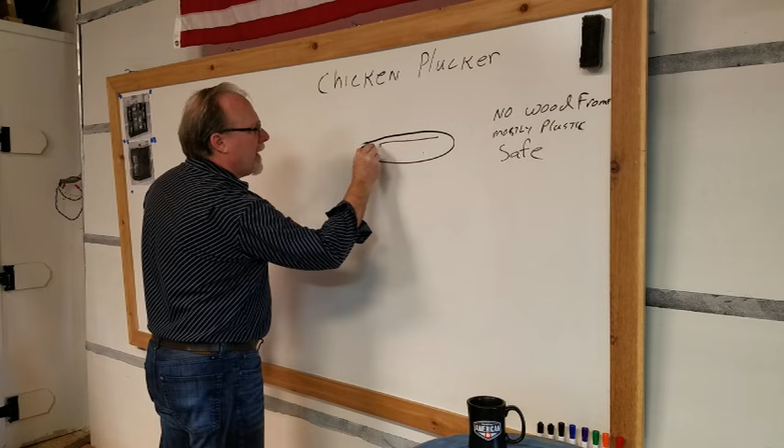So here's the basic plan. I'm going to take and cut the bottom out, or the top, and leave about a 1-inch lip all the way around the drum. The drum's 35 inches tall.

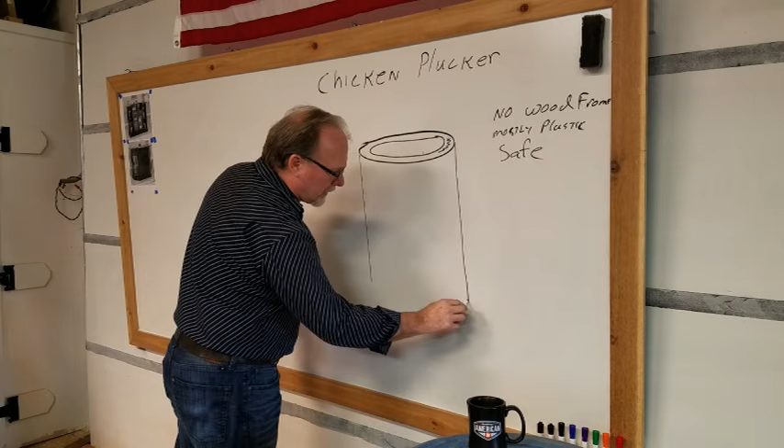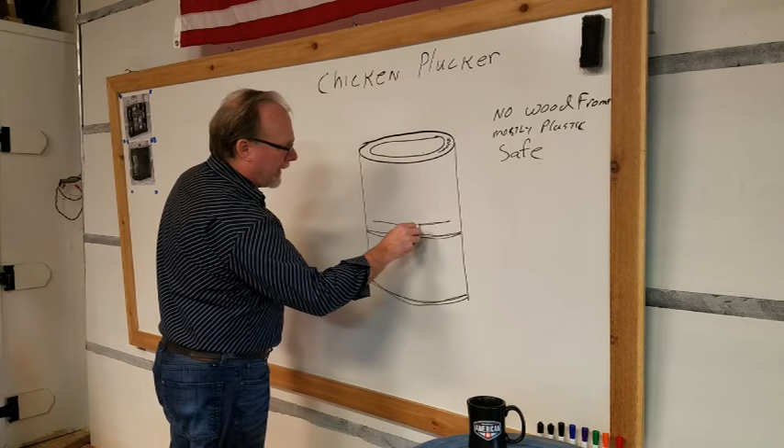About 20 inches down, I'm going to put a polycarbonate partition that'll separate the upper part of the drum from the lower part. And of course, I'm going to put the chicken finger plate, for lack of a better word. I don't know what the heck you call it, but the thing you mount the little rubber chicken fingers to.

You'll have a spindle assembly and a pillow block bearing, a shaft. You'll have a pulley of some undetermined dimension yet, I'm still working out numbers on it. And then a bottom pillow block to support the bearing.

A couple of things over on one side of the barrel. I'm going to have a chute cut in the side for the spoilage. Got to have a place to get those feathers out, of course. I don't want them to fall through.

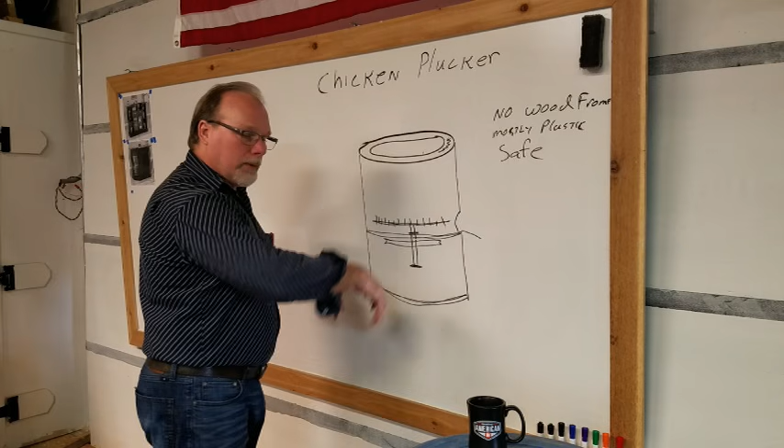The bottom of the barrel, I'm going to cut the complete top out of the barrel, or the bottom, the original bottom. That'll be removed so it's open for drainage. And then along the sides, I'll cut some openings just to help the drainage.

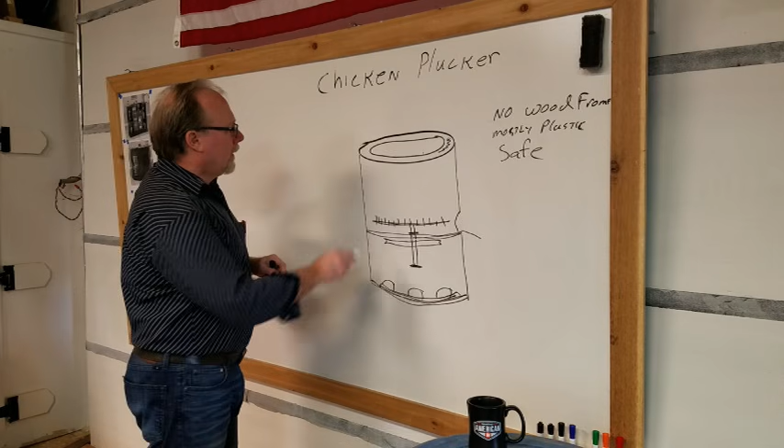I'm going to bend some tubing and mount a frame, kind of like a hand truck, a light mover's dolly. Now I might just go ahead and buy a cheap mover's dolly. I can get one for about $30 at Harbor Freight and modify it. The purpose of this will be to allow you to move the barrel, have wheels on it. It'll also give me a nice secure mount for the motor.

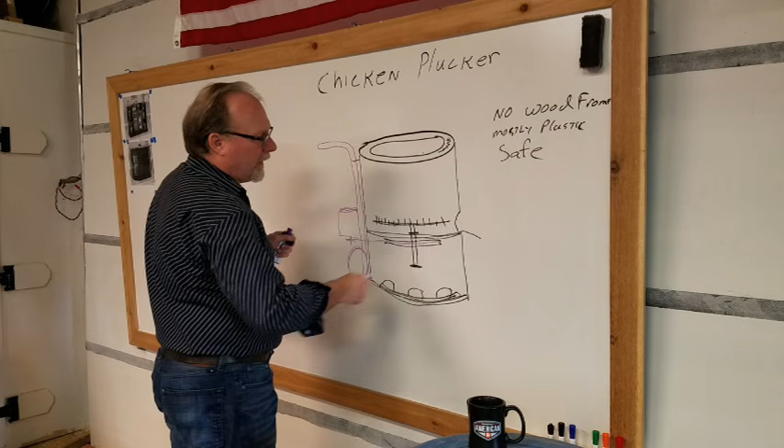We'll put a pulley of some undetermined size, and there's our belt drive. The fingers will mount along the side, just like you've seen in other videos. The goal here is something that he can use, that will last a long time, and not be horribly expensive to build.

Motor's a 1/3 horsepower, I think that's the minimum rating we'll need for a motor. The fingers, about 100 to 150 fingers is what we'll be using.

Along the top, inside this lip, I'm going to put a piece of 3/4 inch PEX tubing in a loop and drill some appropriately oriented holes to jet the water down over the chicken and the fingers to lubricate and wash all the spoilage out.

We'll tee off on the back side here somewhere and come out with probably a standard garden connector with a valve on it. You get these at Lowe's and Home Depot. That'll give us a water cutoff valve and a quick connect.

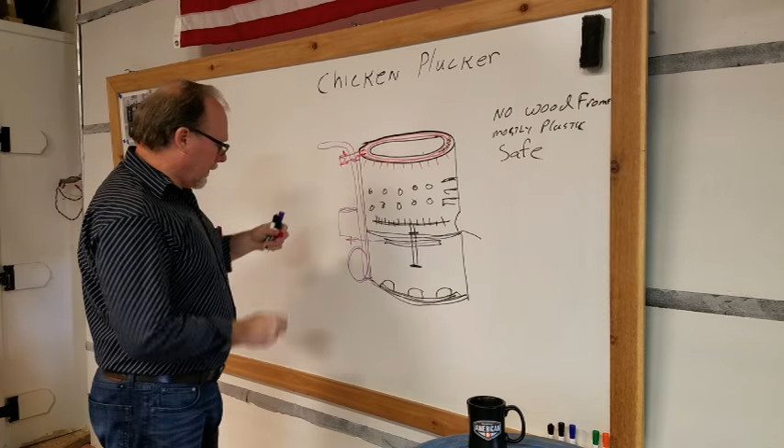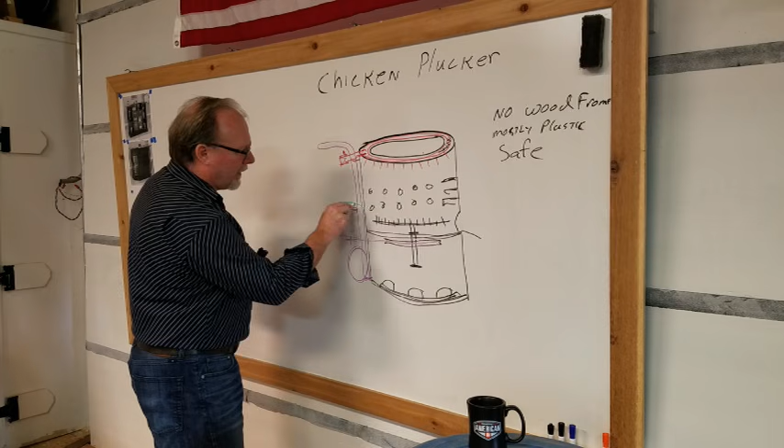And of course we'll have a safety cover. The safety cover will keep the water off the motor, give us a nice drip edge so we can avoid electrocuting ourselves, hopefully. And some type of functional switch that can work in a wet environment without the risk of electrocuting a buddy.

Anyway, that's the basic plan. I've never built anything like this before. I've built lots of different systems, I've designed many systems over the years, but I have to give my friend the credit. He really threw something interesting at me that I think I'm going to enjoy building quite a bit.

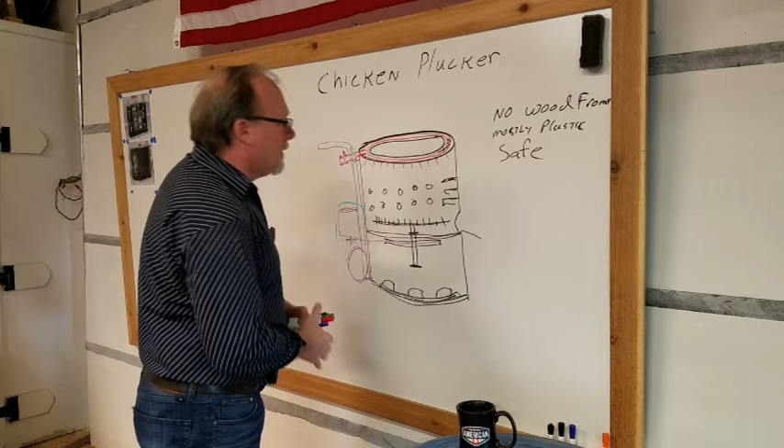The main thing is I want it to last. I want it to be well built so it'll be trouble-free operation, easy to service when needed, and something that you can move around easily and store.

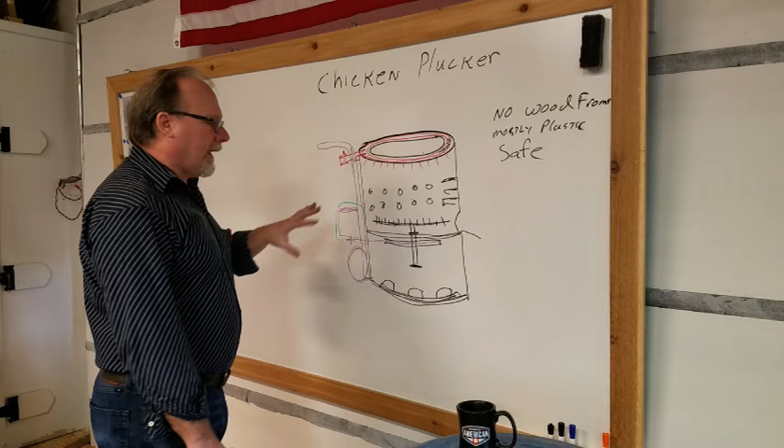No wood on this, like I said. I don't want any wood, that's just going to be a problem. But the metal, I have to consider the rusting and oxidation of the metal. So those are things I've got to concern myself with.

I'm going to engineer this thing on the fly, but this is the basic plan. Like I said, there are all you guys out there on YouTube that have looked at chicken pluckers based on a barrel design. I'm not doing anything radical here, it's pretty much a time-tested design.

The only difference is on this one, I'm keeping the barrel intact. I don't want to cut off part of the barrel and have to build a frame and all these things. Simplify the engineering, simplify the design, keep as much of the barrel as possible, removing as little as possible so we don't sacrifice the strength.

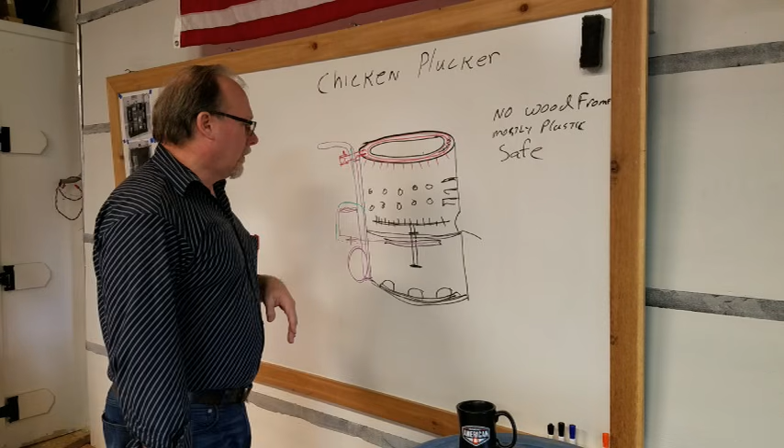Remember, we're going to have - I don't know what a chicken weighs, 4 or 5 pounds maybe, a big chicken - tumbling around in there, maybe 2 or 3 chickens. That's a lot of energy bouncing around inside there. Now granted, it is a chicken, but we still have to keep this thing stable in its function.

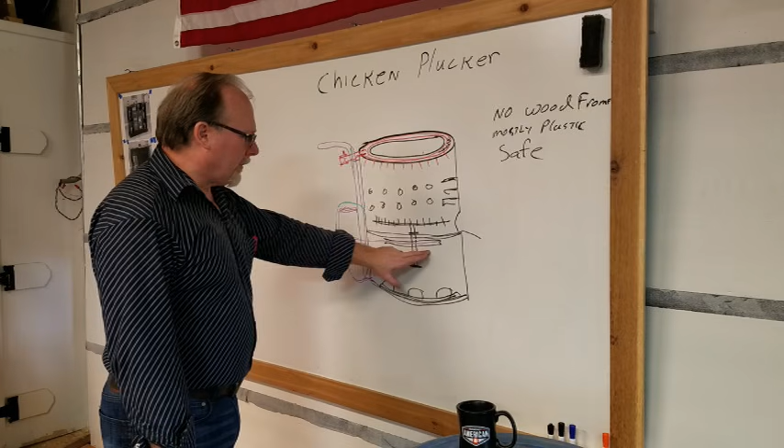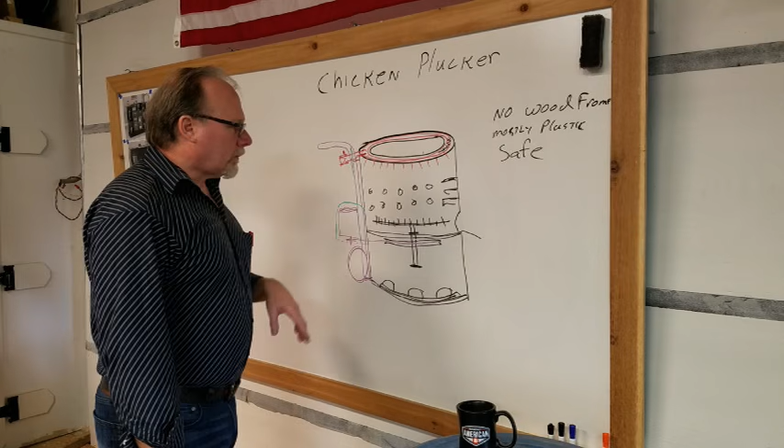Like I said, I don't know the diameter of the pulleys yet, so this ratio, the drive ratio in the motor - 1/3 seems to be a minimum horsepower. That's what I've got to work with. We'll see, so thanks for watching this much, and let's get started with it.

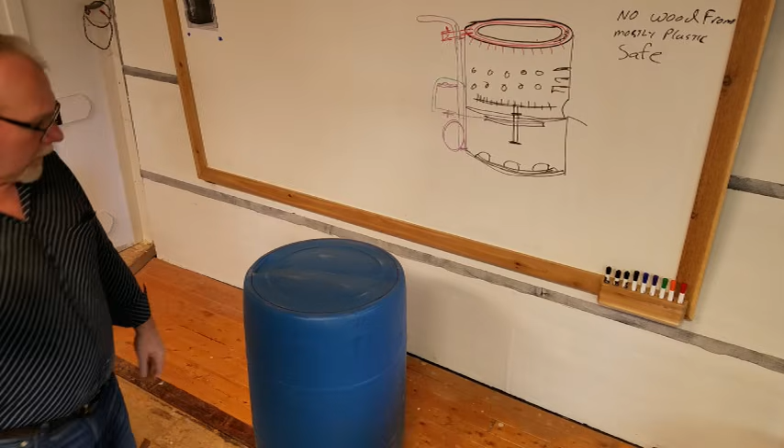Well, this is always the most nerve-wracking part, the point of no return. Let's drill our first hole.

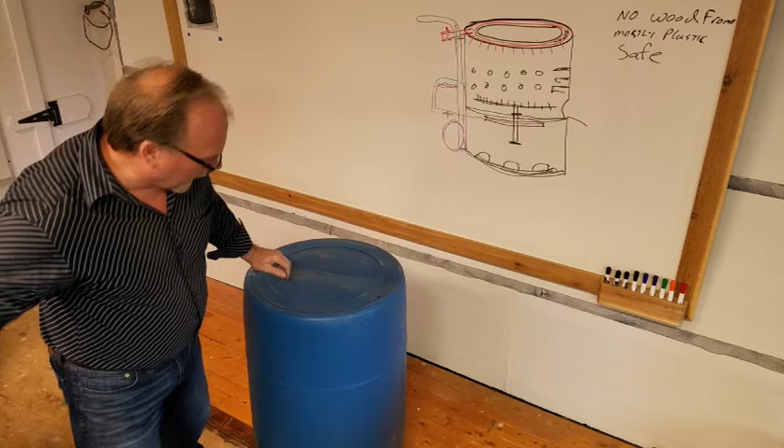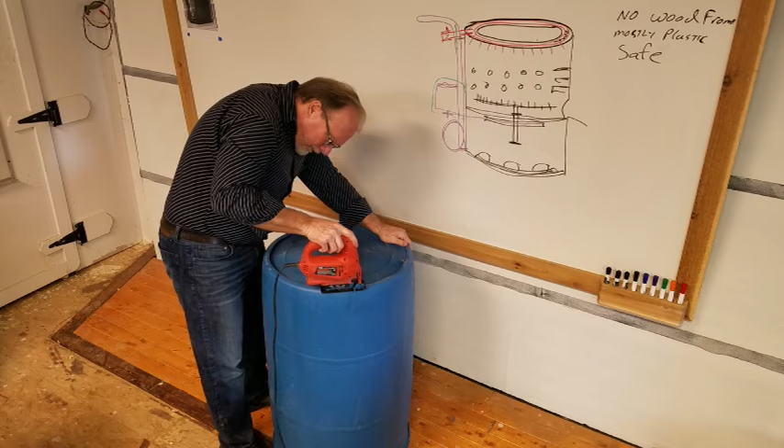Now, I'd like to say a note about safety. Never cut into a container unless you absolutely know what was in it. The risk to your life or serious bodily injury cannot be stressed enough. You never know what you'll find in there.

Here I'm just drilling the holes to set the reference points for the mounts for the upper water tube. And now what we're doing is cutting out the bottom - I'm leaving a cross brace in there. This is where the bottom pillow block, the bearing block, will be bolted. It also gives good drainage.

It won't slide around. If I'd used the soft side or the round end, it would have moved around too much. Now these are just plastic snap PEX clamps - you anchor them to the wall and snap the PEX in. They work really, really nice.

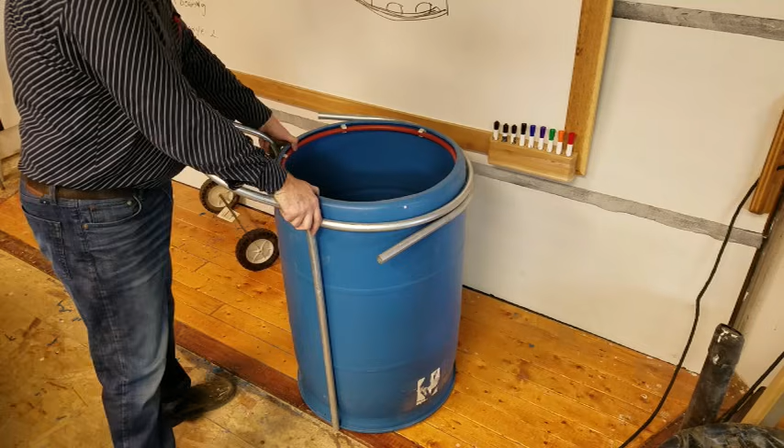This is a piece of 3/4 inch conduit that I rolled so that it fits over the top of the barrel, and another piece of 3/4 inch conduit that I bent into a handle shape. It's been cut and welded together so it's solid. It just slips over the barrel—it doesn't actually mount to the barrel in any way, it's just a friction fit.

It'll help give it some additional strength up there. Once I cut it open, I felt it was just a little too flimsy. Now I've clamped the handle up there, and I'm going to tack weld it.

See, it comes off very easily. There'll be a couple bolts holding it on, I'll show you those later. But see, it just comes off, slides over. The wheels will get mounted to the back of it. I'm going to put a couple of 1/4 inch bolts near the bottom, and that's actually what physically connects the metal frame to the barrel—just 2 little bolts, and the rest is just friction from that upper ring. It's strong and simple. If you ever need to change the barrel: take the belt off, disconnect the water line, 2 bolts. Easy peasy.

Here's just a couple of lawnmower wheels I had laying around. I mounted them up to a couple pieces of angle. Here you can see how the tubing, the PEX tubing, is attached. Now, like I said, the ring is not physically connected to the barrel—it only cradles it, gives a nice friction fit.

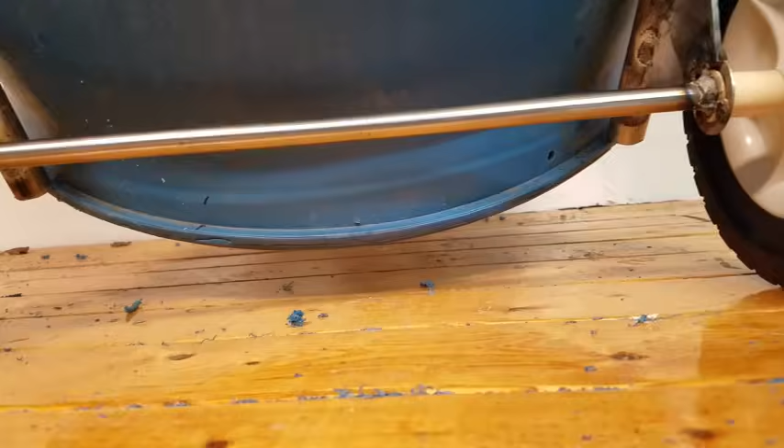Anyway, we're still in initial fabrication, so we'll take it all apart when I've got everything positioned where I want, then do a final welding, dressing the welds, and a coat of paint on it. We've got about a 2 inch gap when you tilt the thing for rolling—plenty of gap there so it's easy to move around.

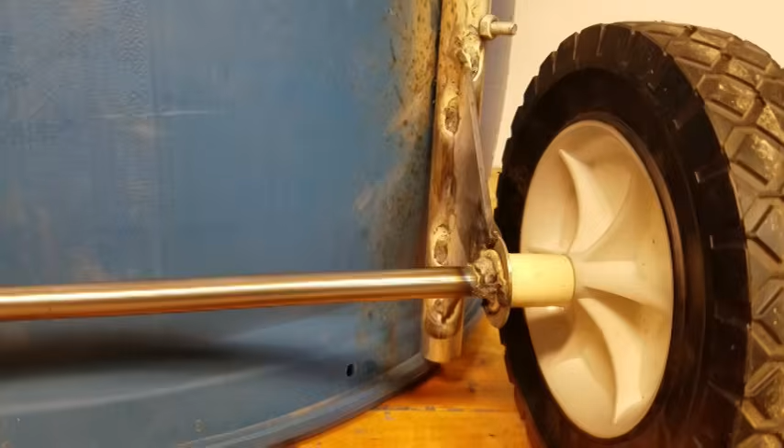And there's the bolt—see the flashing and such. I didn't get all the galvanized off when I welded it. You always want to do that. I don't know how I missed it, but nonetheless, that's what it did. The stuff is nasty, so you don't want to breathe it. You can see the spattering from the bloody flux core—you wouldn't normally get that with gas, but when you run out and you want to keep working on it, that's what happens.

This top plate here is a 1/2 inch thick piece of polymer—I forget what it is, I think it's nylon. And I'm using number 10 stainless steel, 1 inch to 1.25 inch stainless steel screws.

Now here I'm positioning—oh, let's go into a rant for a second. I don't buy fasteners from the big box stores. Everything I buy, unless it's an emergency and I need it and can't get it because of the date or time, I like Fastenal as my industrial supplier. I buy in bulk, I always have leftovers, but they have traceable standards—you don't ever have to worry about your fasteners failing. You get them at a big box store and more than likely they're junk.

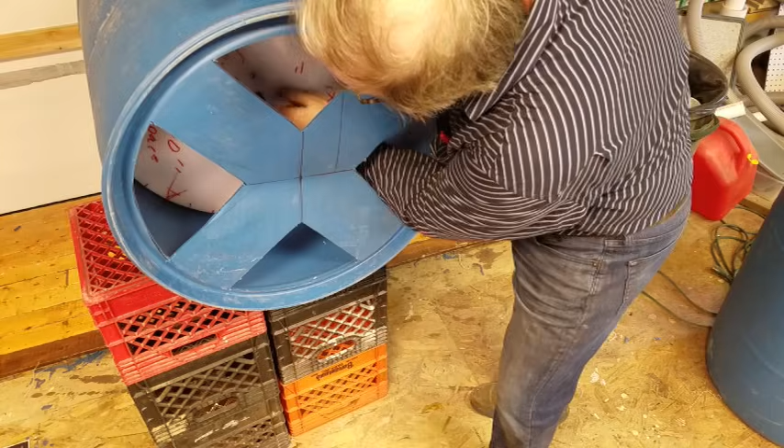So here I'm bolting down the upper bearing block to the partition wall.

It's really important to get everything centered. There you can see all the little stainless steel screws that hold it in place. Now I'm just aligning the bottom bearing block, and this is really pretty critical. If you get this off, your platen's going to be crooked, it's going to be rubbing against the wall, it's going to give you all kinds of grief. So measure, measure, measure, measure.

To allow for variance, this one I'm using 5/16 bolts with 3/8 inch holes, and of course I'll be using nylocks. This is just fabrication hardware, not production hardware. But that allows me to shift the bearing block around as much as 1/8 of an inch. That'll help me maintain any misalignment problems that might occur.

There it is. There's all them stainless steel screws. I put so many holes in this thing.

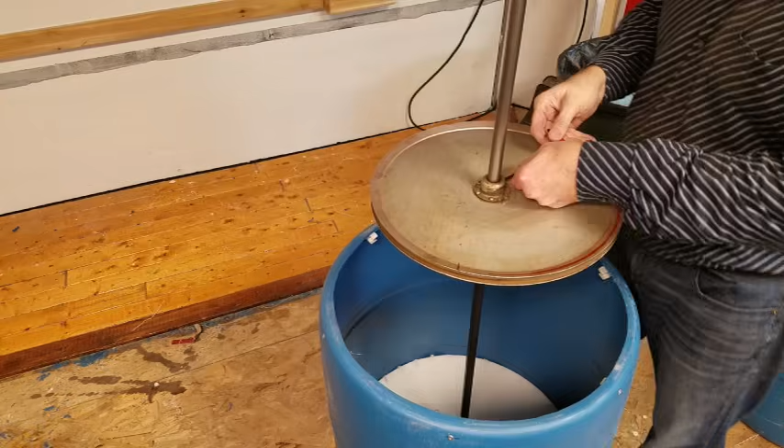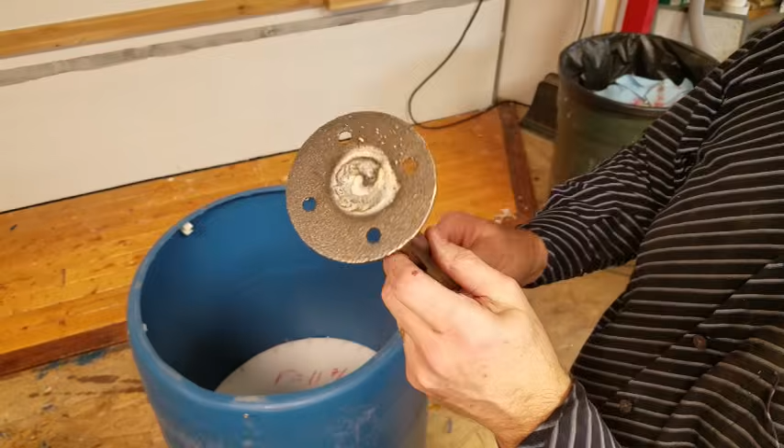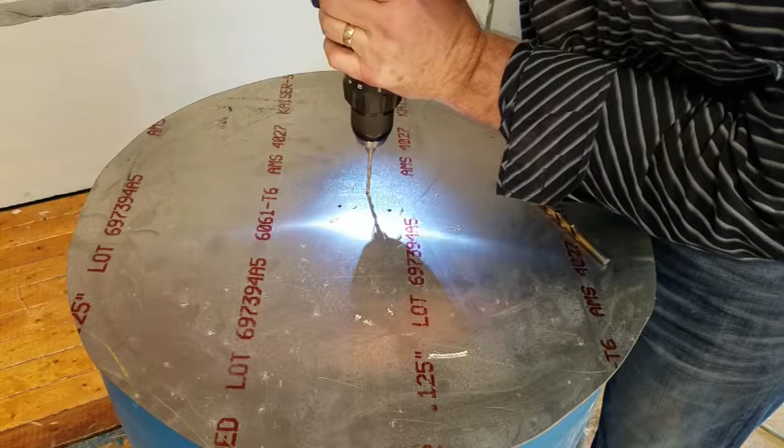Now here's the platen I found. I'm just checking to make sure it's true. It had a couple of bends in it. This is a flange I welded up on the shaft. What I did is I bought a 1/2 inch gas pipe flange, and I bored it out, slid the pipe in there, and then welded it. Made perfect.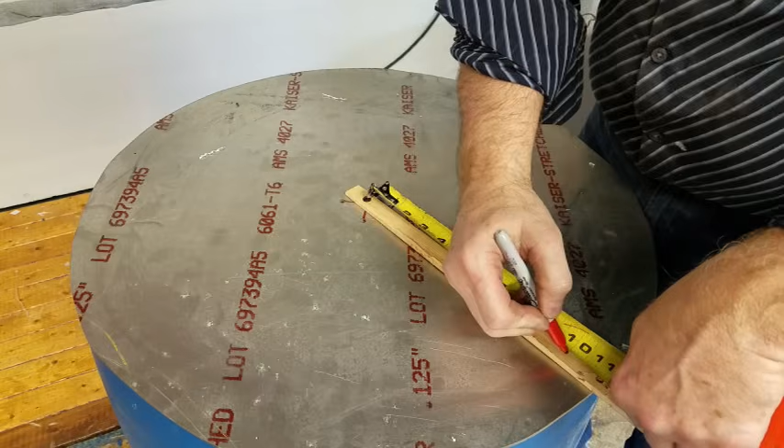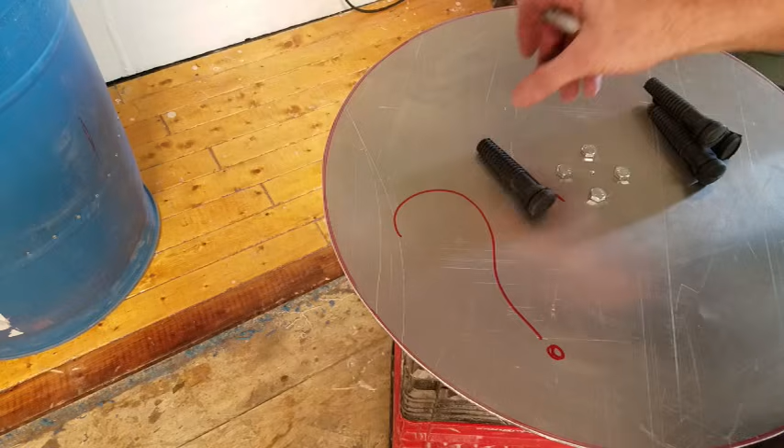Now I'm using T6 aluminum. It's a good quality general purpose aluminum, good and strong. It's an alloy, so it's a little stronger than regular aluminum. But actually I'm using it because I had it in stock. So I've cut the circle to the dimensions I want. Now I've got to figure out how I want to put these chicken fingers. How do I orient them? So I determined the diameter of the circles and the number of chicken fingers.

Now the fun part begins. Drill a pilot hole, then I'll make a larger hole, then I'm going to use a unibit to set the final dimension. Yeah, this gets old really quick. I could have done it on the drill press, but I was out here working, so this is just as fast. And I don't have to worry about cleaning up the floor of my machine shop.

As you can see, there's 4 concentric rings and they're staggered. Alright, now I'm going to 3/8 inch bit just to give myself a little more clearance with that unibit. Yep, that got old. Alright.

We're going to let it cool down. Drill, drill, drill. We're going to let it cool down. Yeah, drill got a little warm. That's a new Lowe's drill I bought. It's 24 volt brushless, very powerful, very torquey. I drilled all those holes on one battery. Pretty impressive. Well, that's 1/8 aluminum plate, by the way.

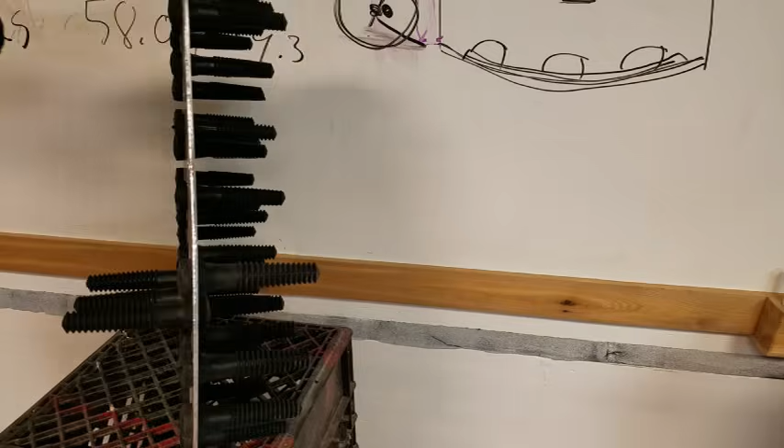Yep, they're fun. If you ever build one of these things, you're going to see what I mean. I considered using stainless for this, but it really would have been excessive and overkill.

There's the plate. Mounting the flange and the drive axle, and we'll get that puppy installed. There's the pillow block bearing, sit in there. Drop it in. Spins. Nice. Look at that. Okay, next set of holes.

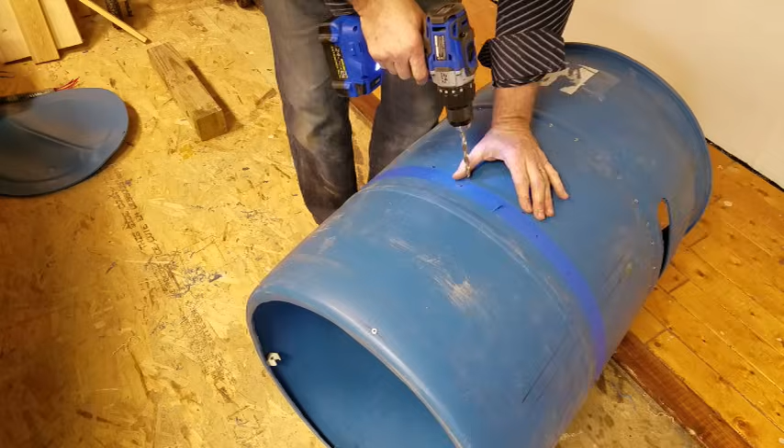This is the holes for the outer fingers on the wall. And again, I basically did the same thing. I calculated the distance apart around the circumference, and then I staggered 3 rows. After testing, we later decided to add a 4th row, again staggered a little lower to the platen, because occasionally the chicken leg would get caught in there, and it would break the leg when it was tumbling around. So the extra row prevented that.

Okay, back to the unibit. At least it's plastic, it cuts pretty easy. That doesn't mean it's any more fun.

But to be honest, this was such a fun project to work on. It's so different, very enjoyable. I had fun doing it for my friend. Alright, more fingers.

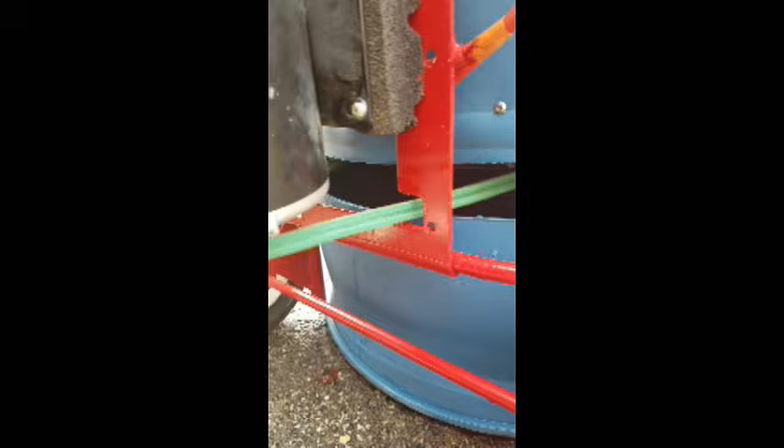Okay, here's the belt. I used a link belt, and we ended up going up to a one horsepower motor. Now there's your on-off switch.

Using again a PEX clamp to hold it in place. That's just CPVC, and that makes it easy to hit it with your hand.

Remember, you're going to be doing these chickens, it's just going to be nasty, messy. You're going to have gloves on, and everything's uncovered here so you can see how it works. This is just a pump stroke switch, just designed to get wet.

And here's the final result. If you've ever seen the movie Dune, it kind of looks like a sandworm, don't it? Seems to be pretty consistent.

Thanks for watching. Still good? No, don't put your fingers in front of it, honey.

All right, hit stop. All right, hit stop.